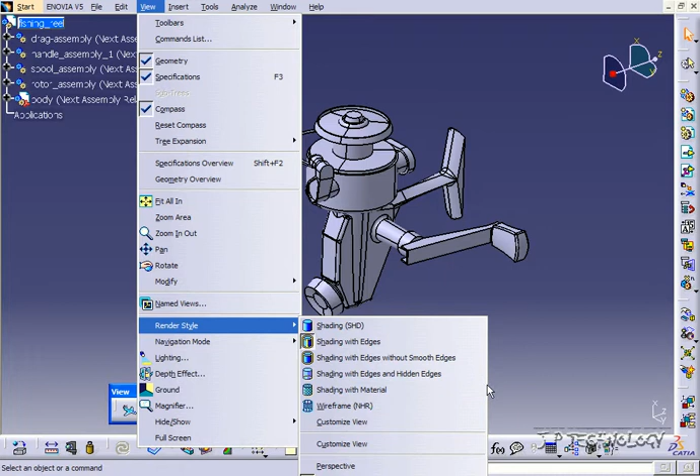Now the render styles, you can find them either in the view box here. These are all your render styles. Or if you go to View, Render Style, you'll have them all right here: shading, shading with edges, shading with edges without smooth edges, shading with edges and hidden edges, shading with material, and wireframe. So what we're going to do is just go through and select them to see the different results you get.

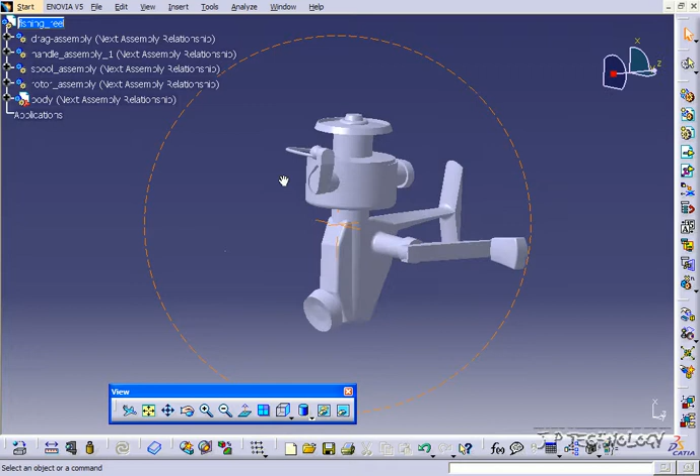The basic one that you'll always have on is shading with edges. Pretty much every part you have will always start out with shading with edges, and it's the easiest one to work with. Just the shading will always give you a really smooth profile and look to your parts.

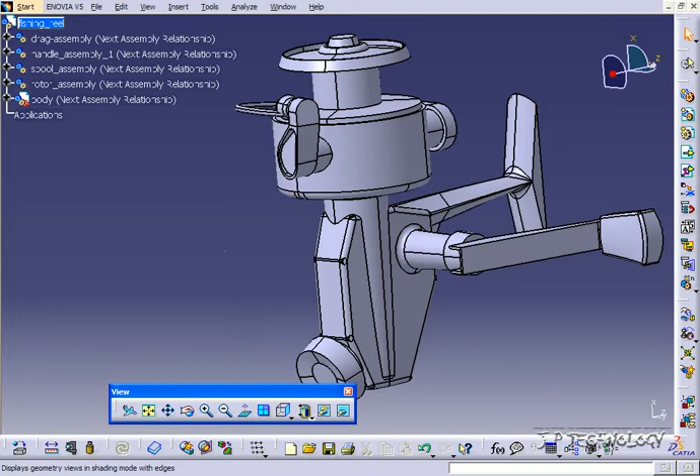Now if you go to shading with edges without smooth edges, you're going to get a few edges that won't be visible that would be with shading with edges. So edges such as these on a fillet. If you go back to shading with edges, you're going to get them. And by removing the smooth edges option, it's going to smooth them out.

Now we'll go to shading with edges and hidden edges. You can see that this one gives you a lot more detail. You're able to see all the edges inside and what's going on. So all the dotted lines are hidden edges that you can't normally see.

Now the shading with material, we went over that when we applied material. You need to select this one when you have a material applied. So whatever material you apply is what's going to be covered all over your part.

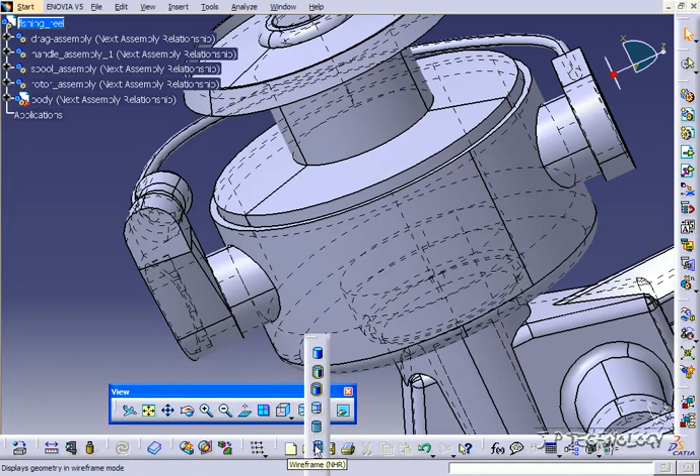Now the wireframe, if you select that, your whole part's going to be in wireframe. So this is more like a 2D version, and it allows you to really see what's going on with all of your hard edges, and it allows you to better picture some of your features and sketches that you're doing on your sketch.

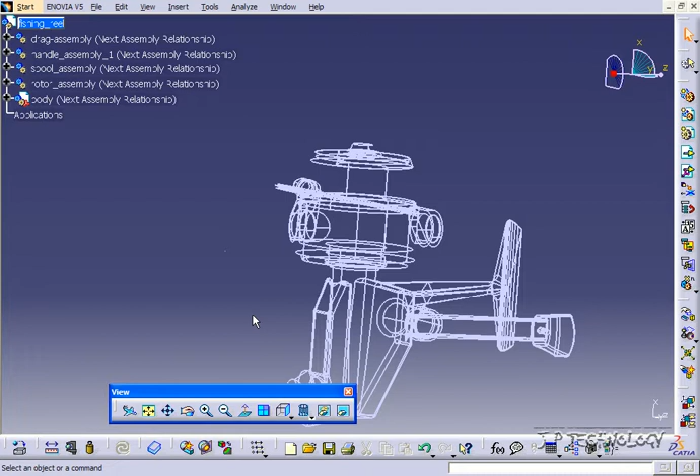In my opinion, the two most powerful ones that you need to use when you're creating your part would be wireframe and shaded with edges. Between these two, these are the two rendering views that I use most when I am creating my parts and assemblies.

And this concludes our tutorial on how to use the render styles within Catia V5.